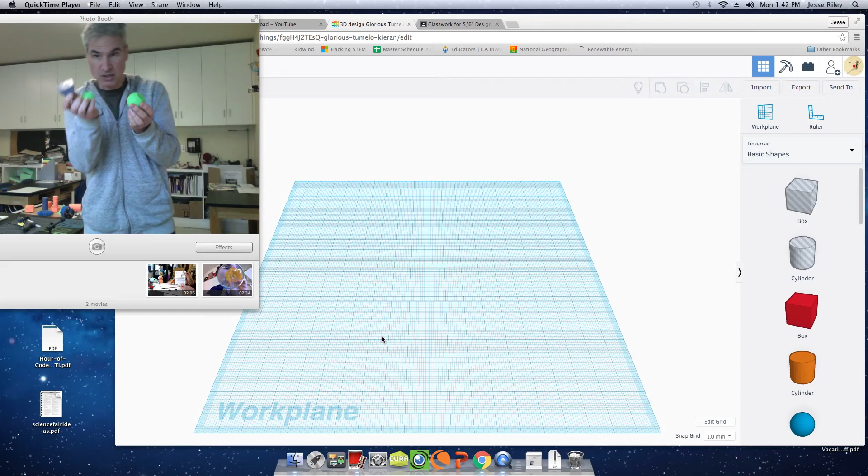We're looking at shapes and how we can take one shape away from another in Tinkercad to create a design. One of the challenges is going to be to take a cone and take a cube away from it. We'll have to get the sizes about right, and I'm going to show you how to do that in Tinkercad.

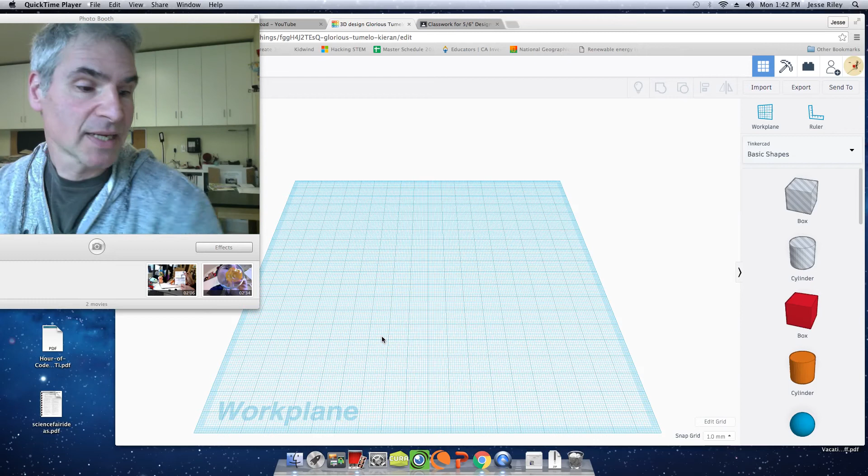We have the work plane, and we're going to start by bringing the cone onto the work plane. Click and drag. Remember, the work plane is considered the base of a 3D printer, so we can think about the sizes. We're going to make a model of a chair design which is based on a cone, and we're going to take a cube away.

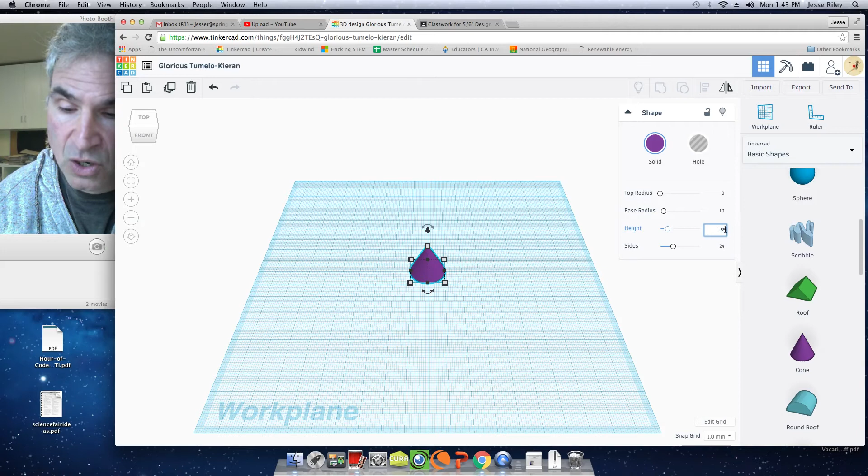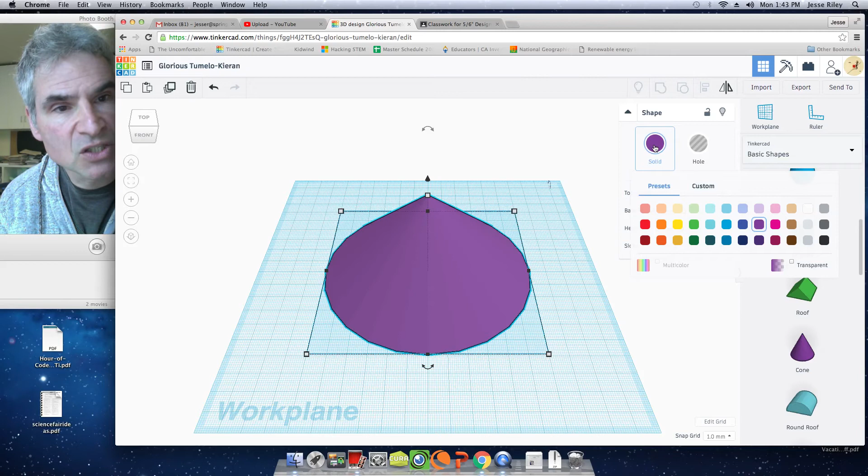So I'm going to go for 55 millimeters height and a radius, let's say, of 60. You can experiment with different sizes. So there's our cone. I can click on it again at any time if I want. It's a solid shape, and if I click on it, I can also change the color.

I'm going to change the color just so it's clearer on our screen. We're going to take a cube away from the cone. We can select the solid cube, or select this icon, which is the cube already as a negative space. I'm going to roughly place it - it should just click onto the grid, so it will snap to the grid.

I'm going to change the sizes slightly. It's more accurate if you click into these value boxes and put in a value, thinking about the size of the cone. I'm going to go for a slightly larger height, 30 millimeters. Let's see what that looks like.

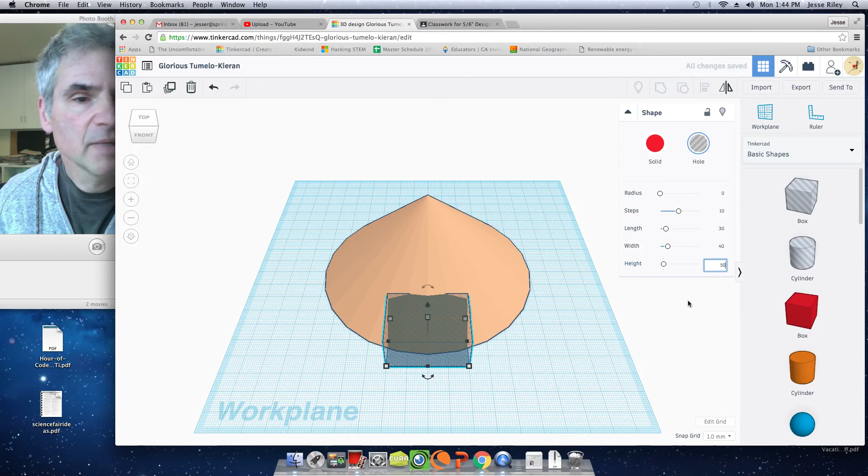Now, if I look at this from the front and take one shape away from the other, I notice that it's going to leave a void or a hole on the bottom. So I'm going to click on the shape, and using the arrow keys, I can move it up a certain amount. Actually, I'll use this one here.

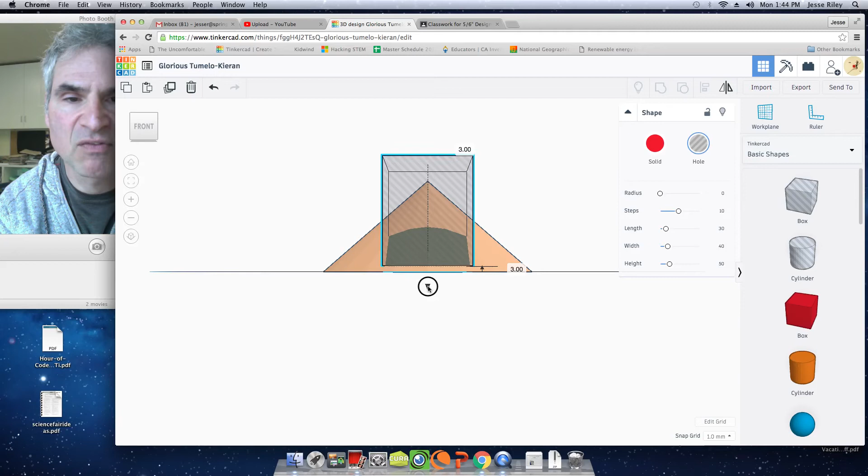When it goes red, I can click and drag, and I'm going to go up until that value is about 5 millimeters - let's stick with 3. So now I know that there's a base of about 3 millimeters.

I'm going to click on the navigation cube, and I can have a plan view or a bird's eye view, and now look at how far into the cone I'm going to have my shape subtract. Let's have a look at that. I'm going to go back to the home view.

Oh, goodbye. That was teacher Jennifer just leaving for the day.

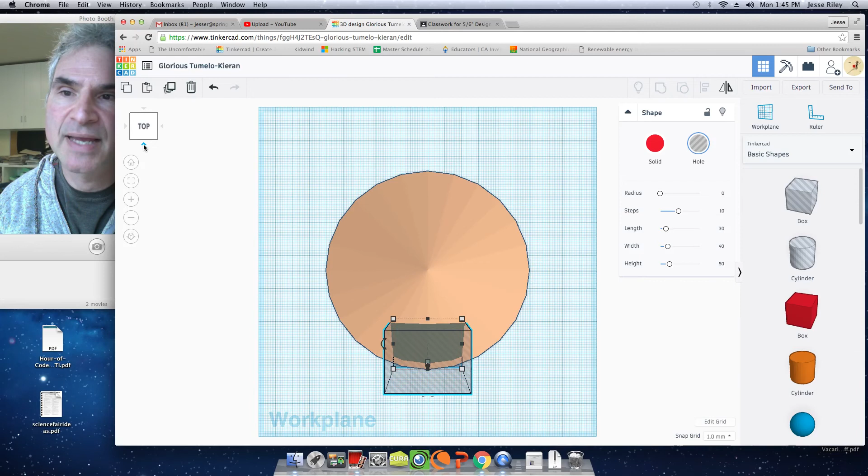Let's use the navigation cube here again. I'm going to do that in a second actually. While I'm there, I'm going to select all - there's different ways of selecting everything. I'm going to click and drag, making sure I have the two shapes: the solid shape, which is the cone, and a negative shape, which is the cube.

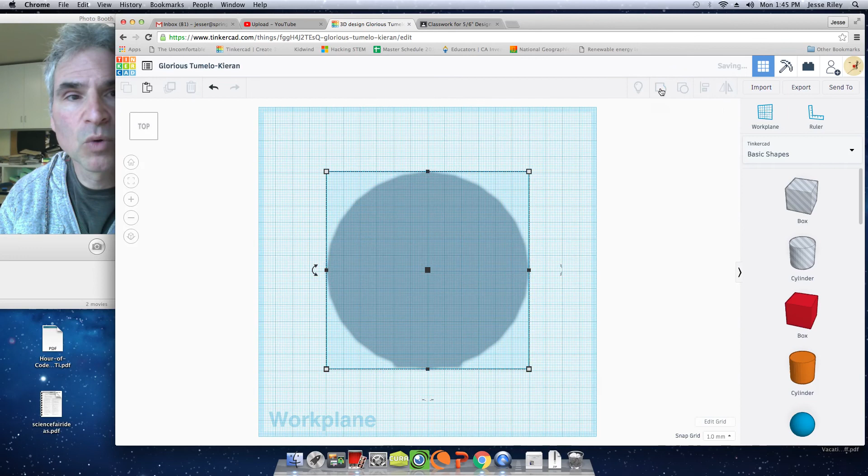This is the icon I want us to use here - it's called group. I'm going to group the two shapes together, and one will be taken away from the other. Let's see what has been revealed. You get a sense of it there. I'm going to look at it from the front. Ah, all right, so this could actually be quite the beginnings of a chair design.

That's one of the challenges, and that's simple enough for you to print that off.